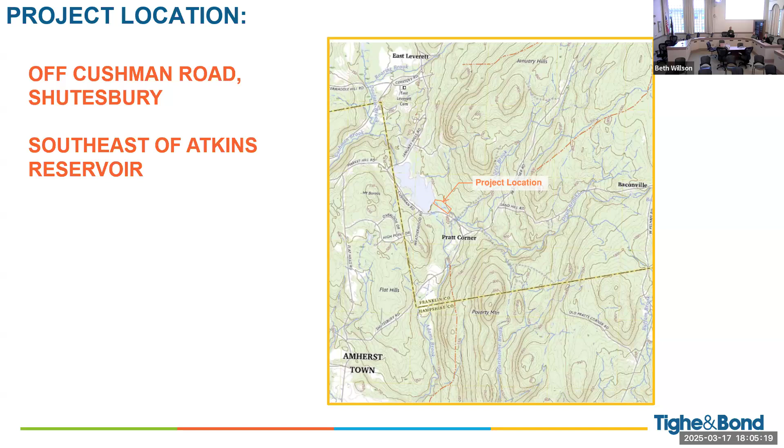So just a bit of background about the project, if you'll go to the next slide. The Atkins Reservoir supplies approximately 1/3 of Amherst drinking water, so it's a critical water supply for the town. The reservoir was constructed in the 1930s, along with a diversion channel that diverts water from Nurse Brook and Dean Brook into Atkins Reservoir as a water source. At the time of construction, 3 basins were also constructed along that channel to capture sediment and allow it to settle before water enters the reservoir.

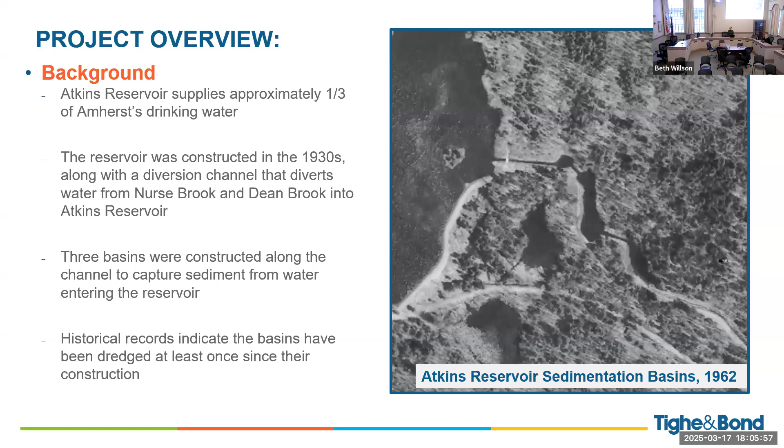Historical records, as well as chemical data from the sediment, indicate that the basins have been dredged at least once since their construction in the 1930s. So at present, all 3 basins are nearing their capacity, which limits their ability to remove sediment from surface water and serve their intended purpose.

In addition, during high flow events, if water were allowed through that diversion channel, it would actually instead pick up sediment that has accumulated in the basins and transport it directly into the reservoir, which means the basins in their current condition impair water quality instead of improving it during high flow conditions.

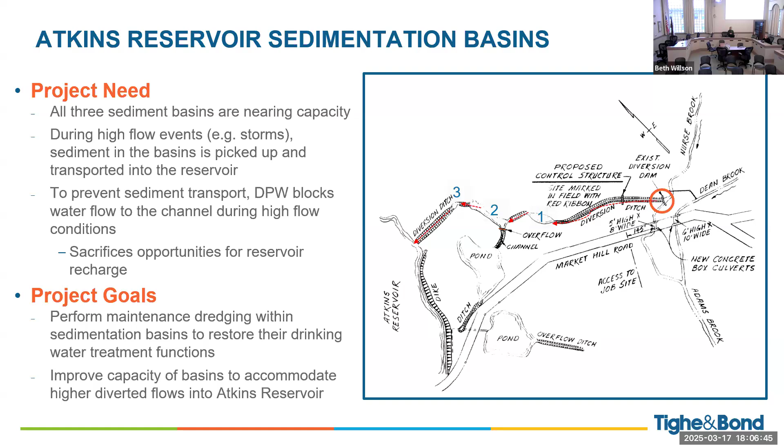And this image just shows us a sketch from the time of construction, showing those 3 basins entering the reservoir on the left side of the image. Next slide, please. Thank you. You'll see another image here of the sequence of basins and the diversion channel entering the reservoir.

So the scope of this project is to dredge all 3 sediment basins to restore their original capacity. The site will be accessed via Cushman Road using existing paths and trails to the extent possible to minimize the amount of tree clearing required for the project. All of the material dredged from the basins will be left to dewater on site and then transported to the retired South Amherst landfill, where it'll be used as cover.

In terms of schedule, we're currently in the design and permitting phase during the spring and summer of 2025. We'll be selecting a contractor this fall and winter, and then construction is expected to start in fall next year, in 2026.

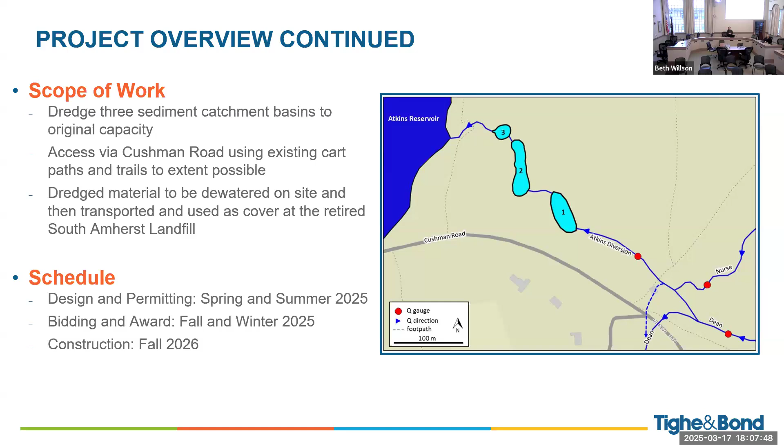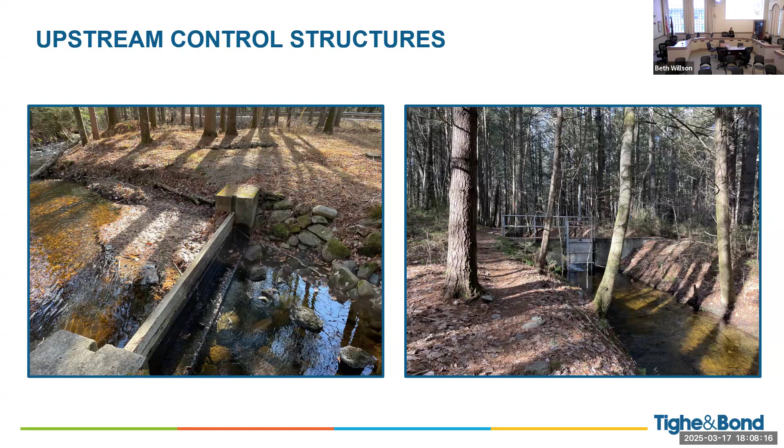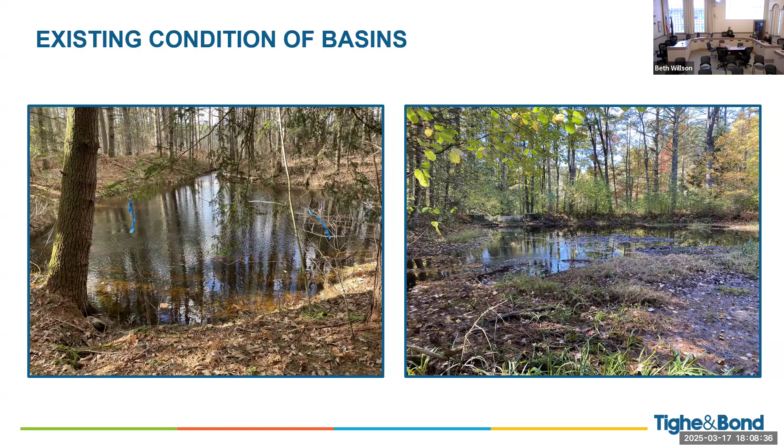Some pictures of two of the existing basins. On that right-hand picture especially, you can see that sediment has accumulated to the extent that it's actually supporting the growth of vegetation within that basin. That should just be space for water and sediment to settle.

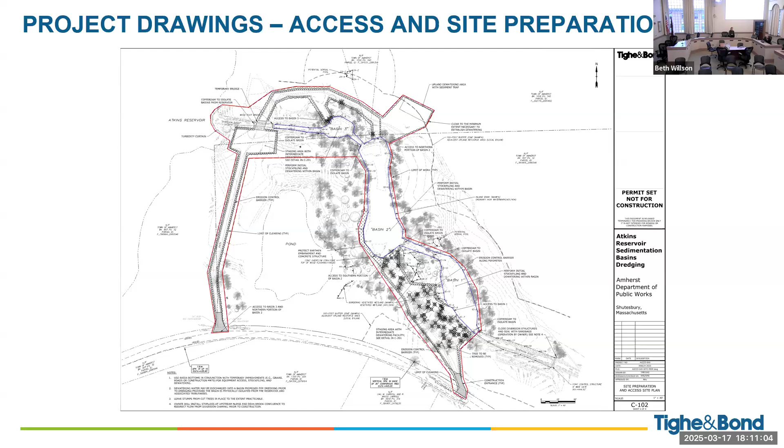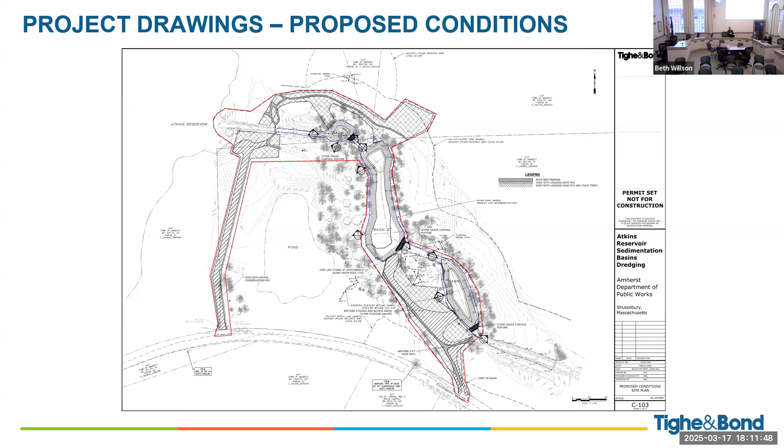And those solid gray areas are existing pathways that will be restored and maintained as paths, so there won't be any change in their condition.